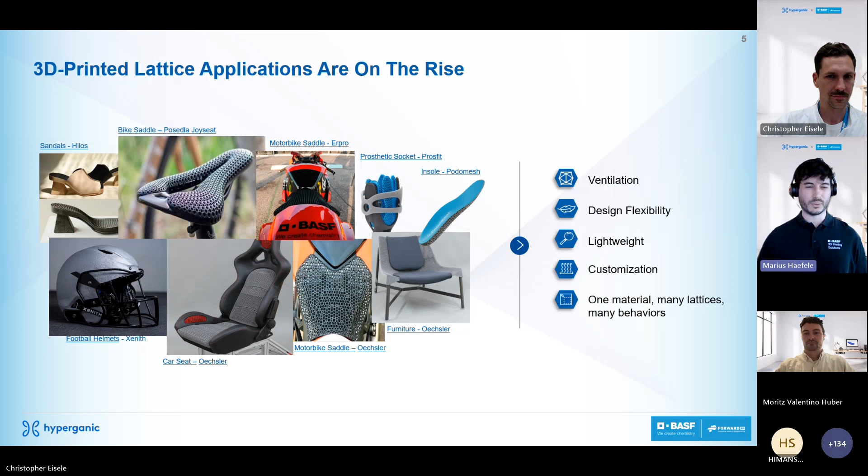And these structures derived from nature become increasingly interesting in manufacturing, and with 3D printing, they can be realized quite easily. You find these lattice structures in football helmets, bicycle helmets, ice hockey helmets, in bike saddles, in footwear applications such as shoes. And here they typically enhance the product performance, reduce the material usage, and enable innovative designs.

Now, as interesting as these lattice applications are, the development of these lattice applications still requires a lot of expertise in order to design these complex structures. And oftentimes what we see is that companies that have an idea to replace a certain foam part with a 3D printed lattice structure, during the development, drift off in what we call the lattice road to hell.

You have to choose and select the right printer, machine, material combination. You have to invest into a software. You have to invest into the license. You have to educate and train your engineers. That can already take several weeks, up to months.

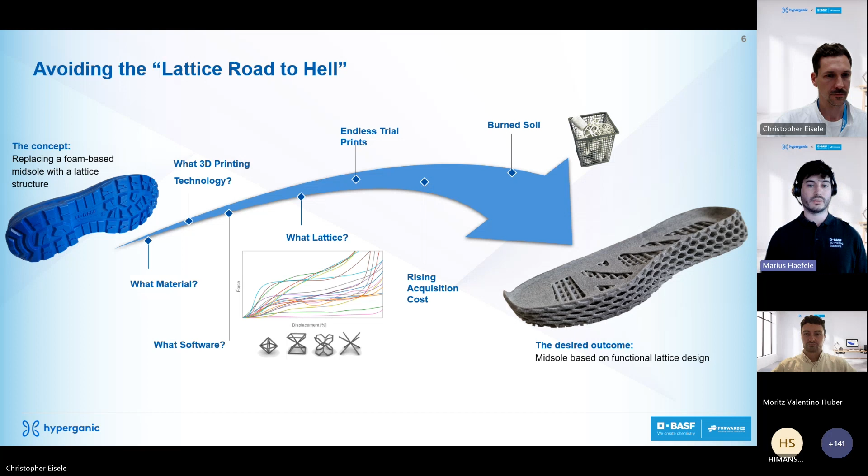Then, once you understand, let's say, the basics, you have to understand what is the right lattice structure, for instance, to mimic the behavior of such a foam. There are so many different lattice types out there that you have millions of options to choose from. The lattice application development should not be this difficult. In order to not make it so difficult for everyone, we decided to do two things.

First, we built a lattice library. It is fully publicly available, and it contains pre-selected, validated lattices that allow you to quickly filter what lattices work for what applications. Here you can filter the lattices by applications, for instance, footwear, protection and seating, or you can filter by the technical requirements such as the stiffness, the Shore hardness, the compression stiffness at certain rates. And this really helps you to find the right lattice much, much quicker without having to go through the lengthy development cycle.

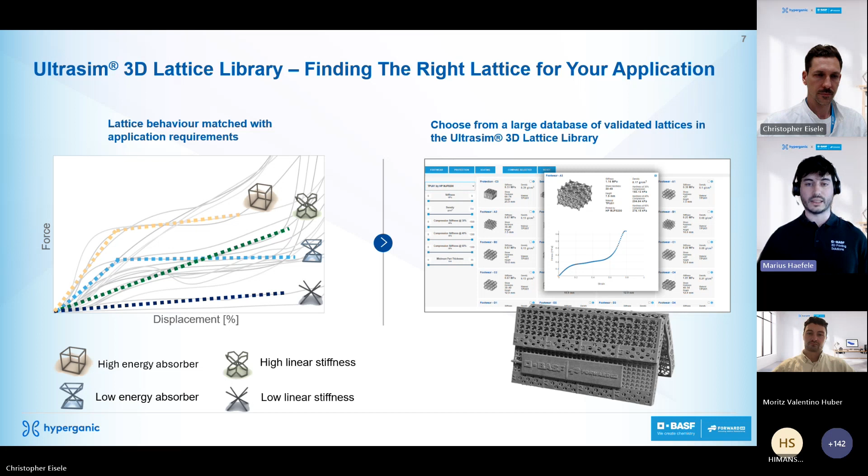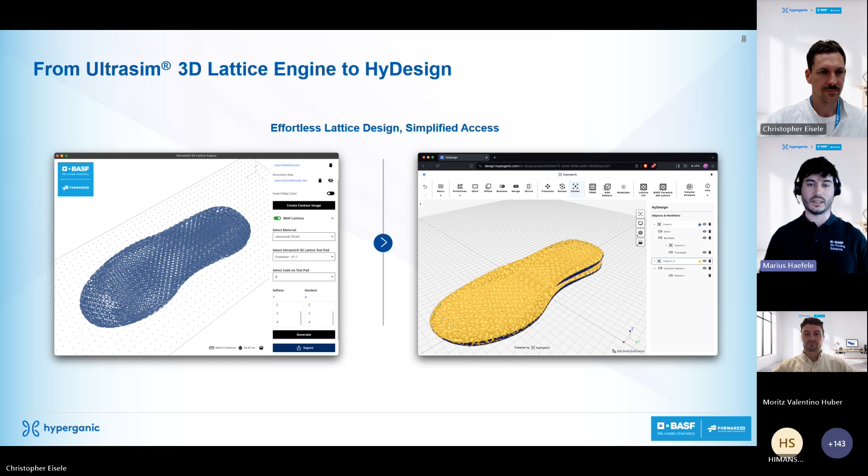Now, the second thing that we did in order to make it easier was to partner up with Hyperganic. So we listened very carefully to the users of the Lattice Engine and to the overall market, and we incorporated those features and functions into the cloud solution called HyDesign. The Ultrasim Lattice Engine is now maturing into HyDesign as of today. Such as shelling, booleans, offsets, skinning, transforms, essentially all the functionality one would need to create functioning lattice products.

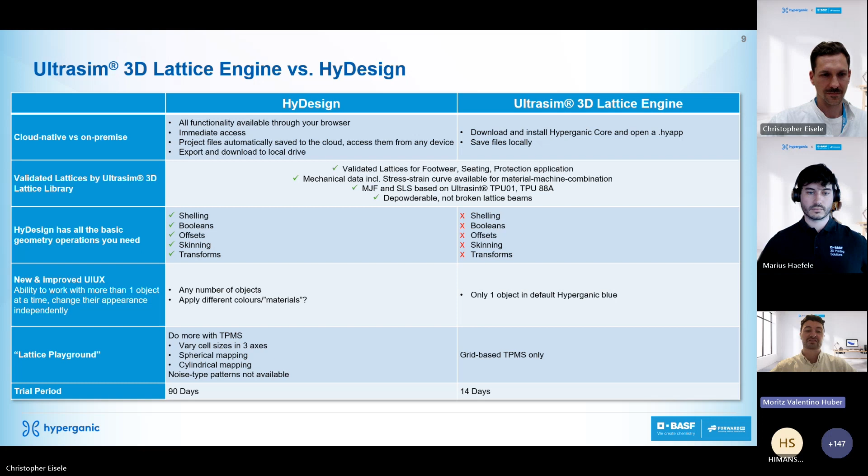And additionally to that, we introduced a far more capable and far more versatile TPMS approach. Before, you only had the option to do grid-based TPMSs, while now you can do pretty much everything with TPMSs that you would wish for. You can grade them, you can vary cell sizes, you can map them spherically, cylindrically, you can merge TPMSs into each other. So you'll see my browser now.

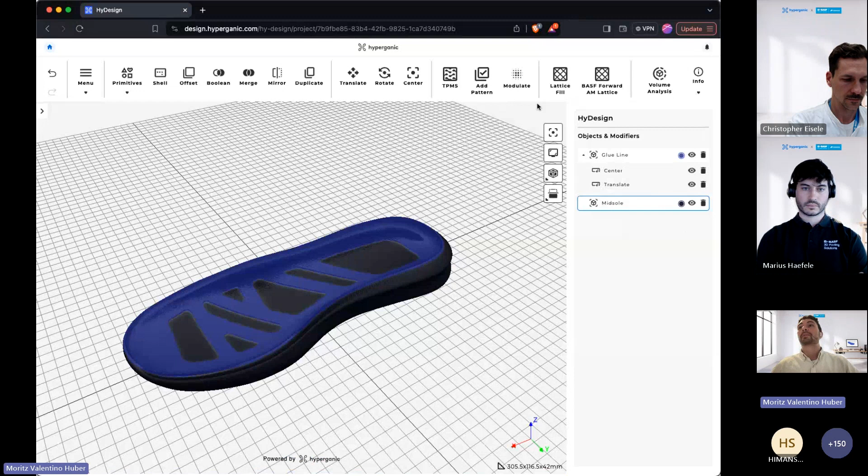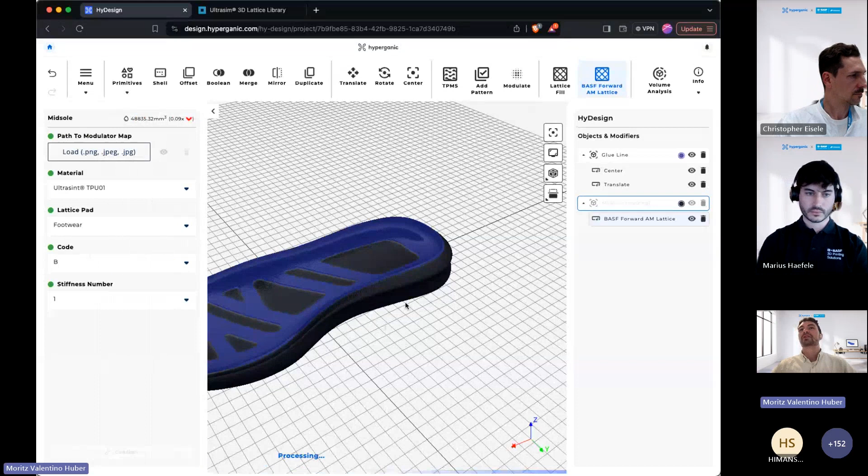I select the footwear lattice pad to filter as well. I select the code B and I select 1. And you'll see a uniform lattice infill through this midsole. I'll quickly disable the view of the gluing line, and in fact you'll see the midsole is entirely infilled with one latticing structure. So now I want to modulate my lattice thickness.

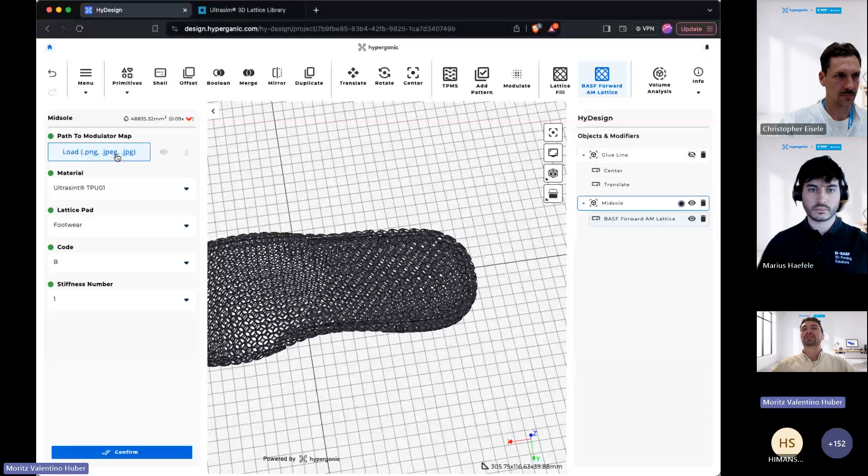I can go back and do that by uploading grayscale images. It's the same as you're used to already from the Ultrasim 3D Lattice Library, a very accessible way of doing so. We can essentially stretch the images so that they fit over our midsole file. And we'll see that in the areas where there's a bright color, in this case white, the lattices will be thickened, while in the areas where it's black, the beam thickness will stay at the minimum value.

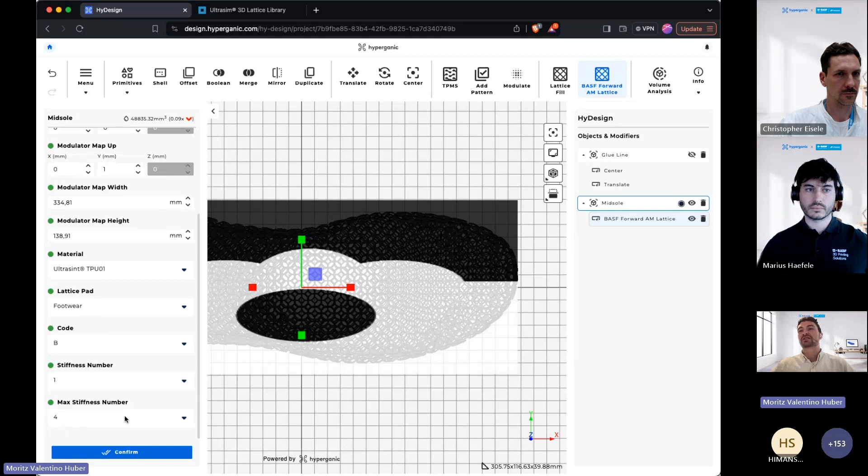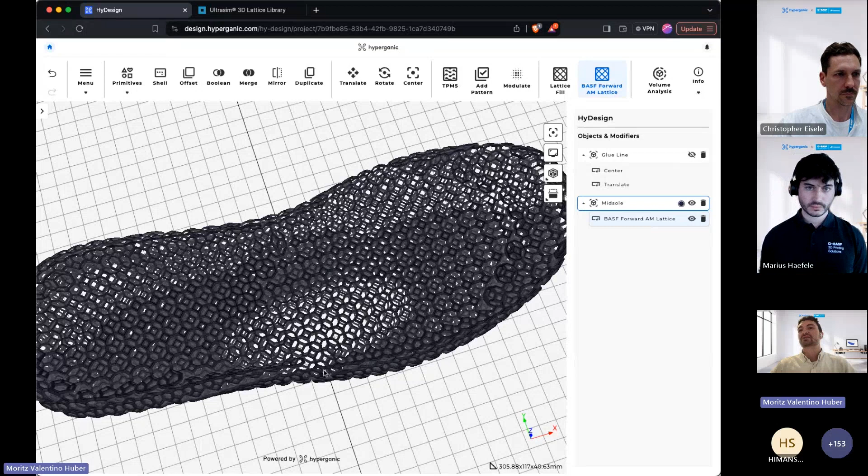So therefore, let's increase the maximum stiffness number, essentially the beam thickness, and run this modulation. And in just a second, we should see the results. There we go. So now, as promised, you can see that in the area where we had white color, the lattice beam thickness has been thickened quite a bit. And in the other areas, it remained thin.

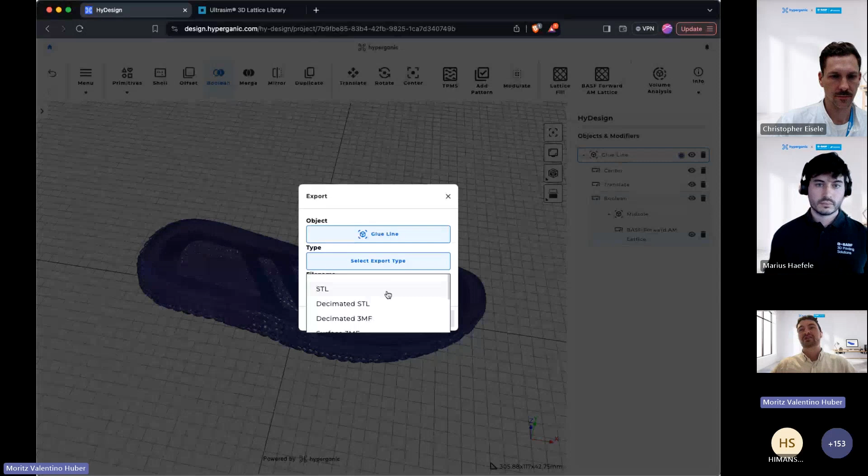I'll Boolean union these together into one midsole that we then can export and put on the printer. So the last step remaining is to export this file. We support a wide range of exports. We support STLs, decimated STLs, where you can specify a relative error in order to determine the ultimate file size. The bigger the error, the smaller the file size, obviously. The same holds true for decimated 3MFs, and we support surface 3MFs.

Surface 3MF are essentially the OBJ-based 3MF, the traditional 3MF.

Shout out to Duan in case you're watching this.

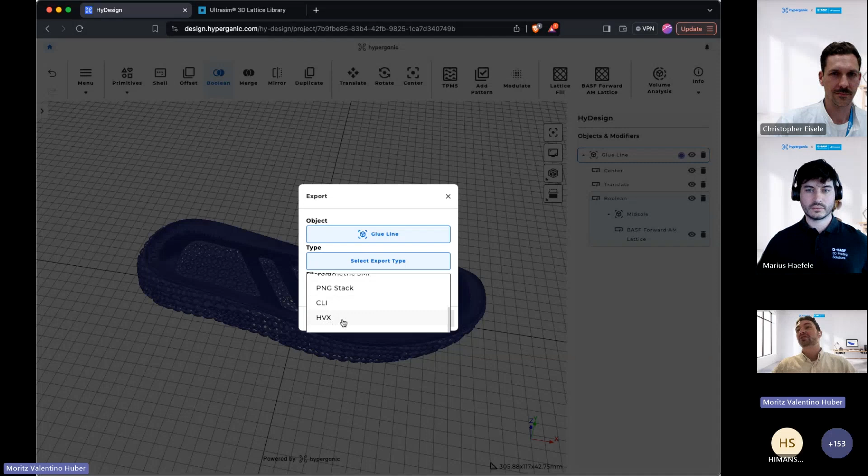We support volumetric 3MF, PNG stacks, CLI files, which are laser path files, and our proprietary HVX file, and select export. So you could infill objects with only one TPMS all the way through, or you can add a pattern like I did here and merge two patterns into each other.

Thank you so much, Moritz and Marius. That was really exciting. We really saw the unique capabilities of HyDesign and how easy it is to create superior lattices in a matter of minutes. And talking about features, our feature roadmap is packed with very, very exciting new developments.

As you all know, Hyperganic develops technology such as simulations as well. And we're looking to integrate our immersed boundary simulation methods, our meshless simulation methods for structures and fluids into HyDesign in the coming months. Also, more immediate for the consumer good applications, we'll launch some features for conformal latticing and further extensions to our TPMS capabilities.